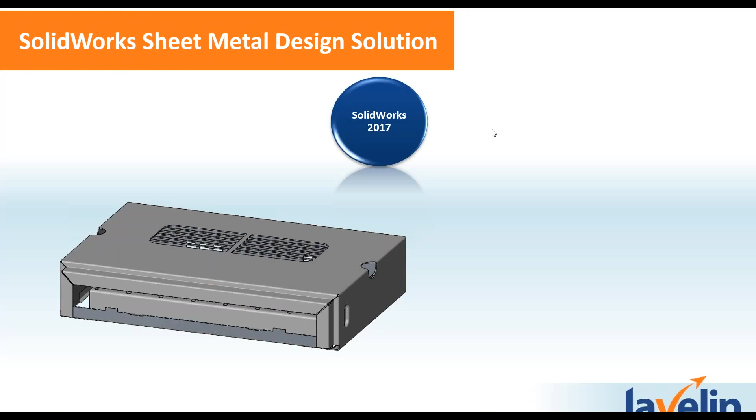So now we're going to talk about the solution. Let's get to our solution demonstration. We're going to be talking about SolidWorks 2017. And what SolidWorks does is let us do several things, such as leverage our legacy data, so we can use previous files that we have to create new parts. It lets us design fit and function in context around the parts that we have. And it also lets us modify our existing processes to switch parts between machined and sheet metal manufacturing. This is the advantage of working in 3D, the advantage of working with SolidWorks.

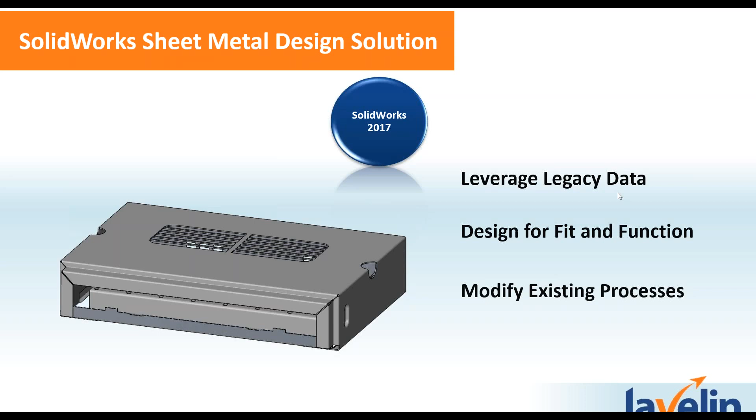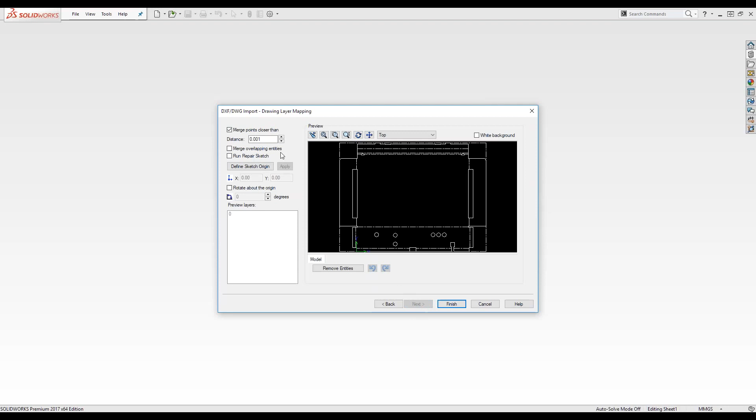So let's get straight to it. Let's talk about using SolidWorks to leverage legacy data. For this, we're going to open up SolidWorks, and I have a DXF that I created. It's the flat pattern of a part that we have. What we're going to do is import it as a new 2D sketch. You can see it gives me several options here. I'm going to merge any overlapping entities just in case there's a mistake, and I'm also going to run the repair sketch just to be sure that we're avoiding any errors as I do this.

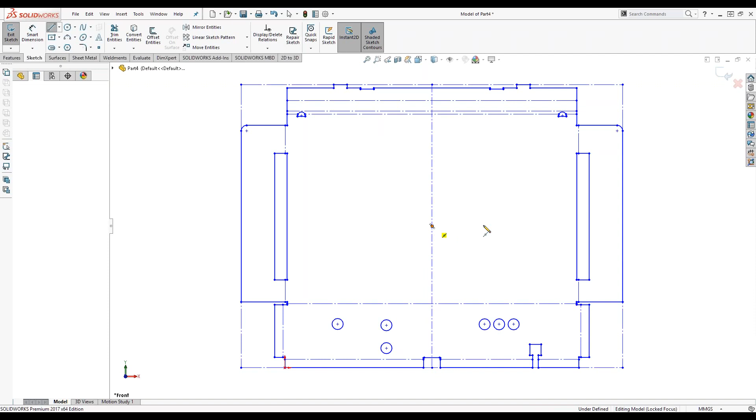You can see here the repair sketch utility let me know that no problems have been found. So that's great news. We can get started with our part. And here it is, you can see that's been imported as a sketch. And I can actually add things to this as necessary. I'm going to add a couple of construction lines here, just so that I can find the middle of my part. This will be helpful later on, but it's good just to know where that middle is going to be.

And so what we can also do here now is we're going to escape out of our sketch, and we can see that this part is not actually on the top plane, it's on the front plane. So it's very easy for me to go in here, just say edit sketch plane, and select the top plane as the new place for it to be. And you can see it orients accordingly.

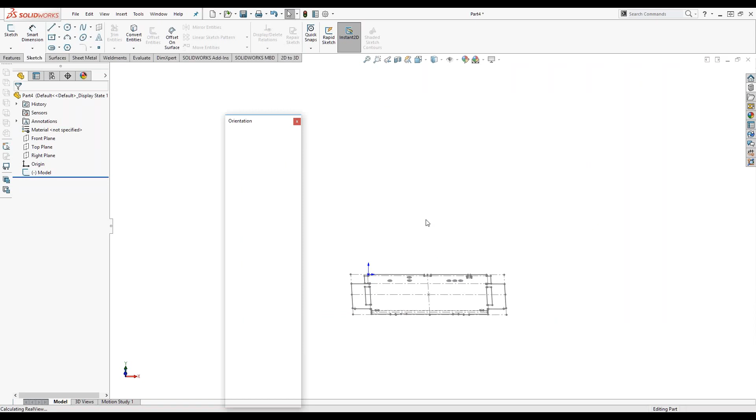So what I'm going to do is flip to my top plane, and we're going to start making some new sketches. So the first one I'd like to do is I'd like to select this entire outline, and I'm now going to convert it into my new sketch. And you can see it shades in. SolidWorks letting me know I've got a closed contour, so I can start making a part out of this. Not going to do that quite yet, though. I'm going to make a couple more sketches here.

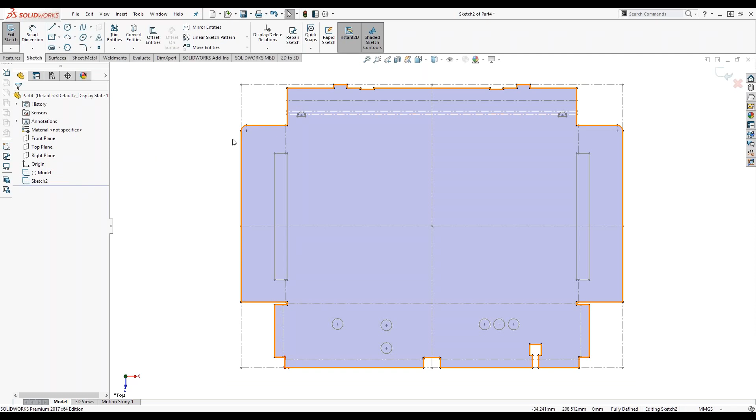So I'm going to make one which will be all of my cutouts. So you can see that there are quite a few things here, which I'm going to need to make into cuts. So I can just use the select chain tool on all of those. And then I can grab these circles here, because these are all going to become punched out parts of my sheet. Sorry about that. I escaped before I was done. I have to remember to hit the Convert Entities button.

So if you haven't used this before, the Convert Entities can also be used to take lines and edges and things like that from other sketches and other features. And so it's very useful when we're working in SolidWorks. There we go. We're also going to make another one here. Just convert my bend lines in. And so we just need to select all of those. And so this is just what we're doing right now. We're grasping the information that we've put in to our part, and we're telling SolidWorks what's important, what we need to keep.

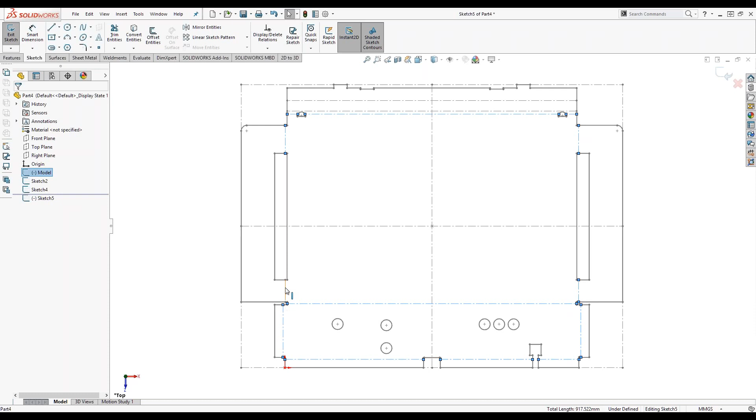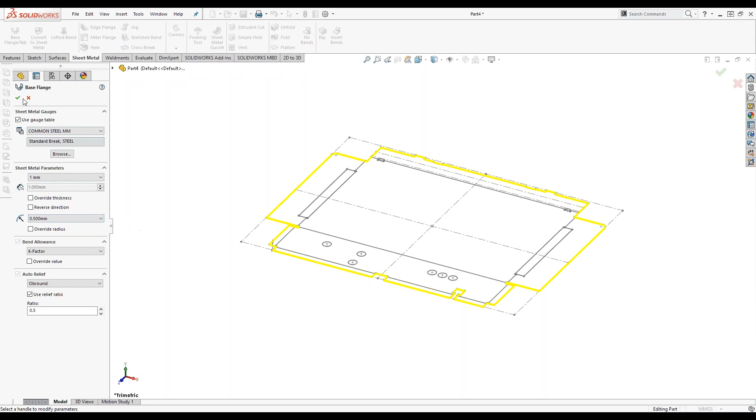Good. So at that point, what we can do is we can actually start making this. So if we go over to our sheet metal tab here, we can say create a base flange. And you can see it's picked up that it's a closed contour. I'm now going to choose a gauge table. And what this gauge table allows me to do is it allows me to tell my designers, these are the different types of material that we have. Feel free to design with them. And I've already got information like my material and some of the different bend radii included in it. Then at this point, all I have to do is hit OK. And now we've got a flat sheet.

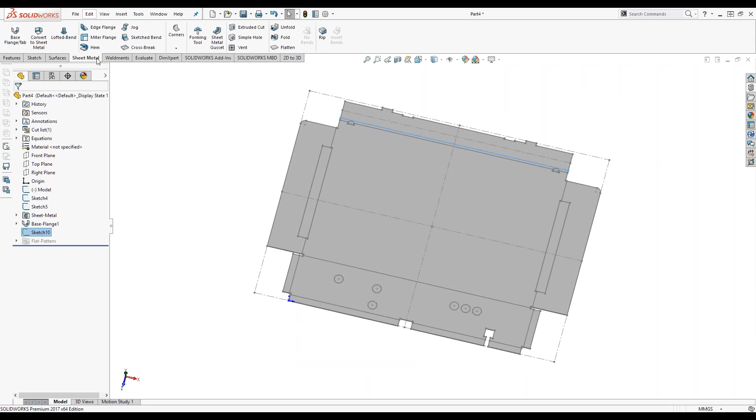At this point, just before I do anything else, I'm actually going to create a jog. And so in order to do that, I'm going to need to make another sketch. And we're going to use that Convert Entities one last time. So I'll create that. And then from there, I'll go to Sheet Metal. And I hit Jog. All I have to do is select the fixed face. And you can see it's giving me a detailed preview of it now.

I'd like to flip the side. And I'm also going to say I'd like to fix the projected length because we know this is the flat pattern that we're working with. So it doesn't make sense for it to project it as the same length. And there we go. There is our jog. We started bending our part.

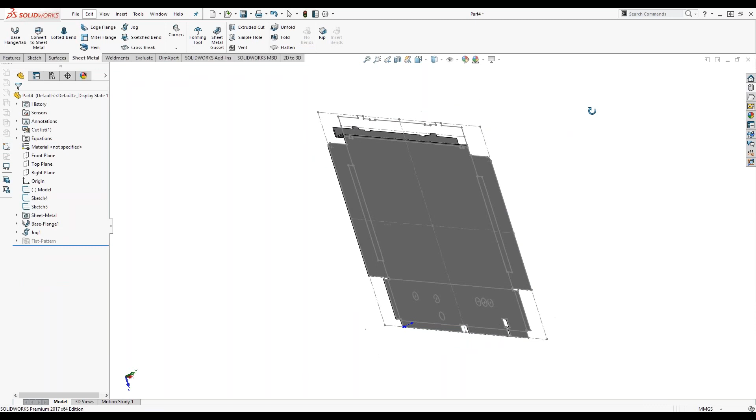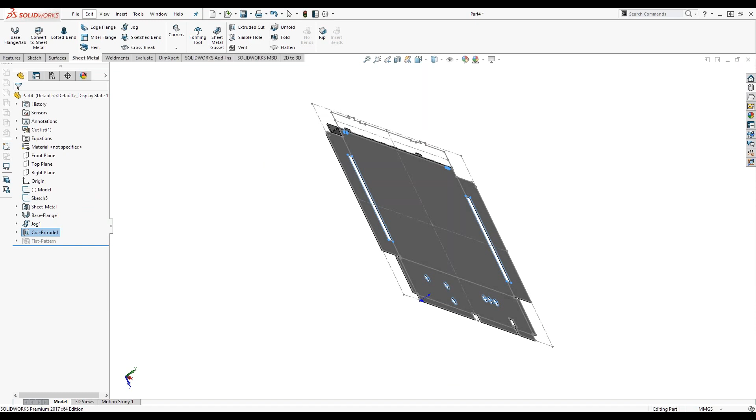Now we can take all of these cuts here and we can turn those into extruded cuts. Really cool feature that I've got turned on there is the link to thickness. So you can see without it here, it's doing a 10 mm cut. Or I hit link to thickness, and it now doesn't matter if I change this to be thicker sheet metal, it's automatically going to link it to that thickness. So that's very helpful, and that saves me time later on.

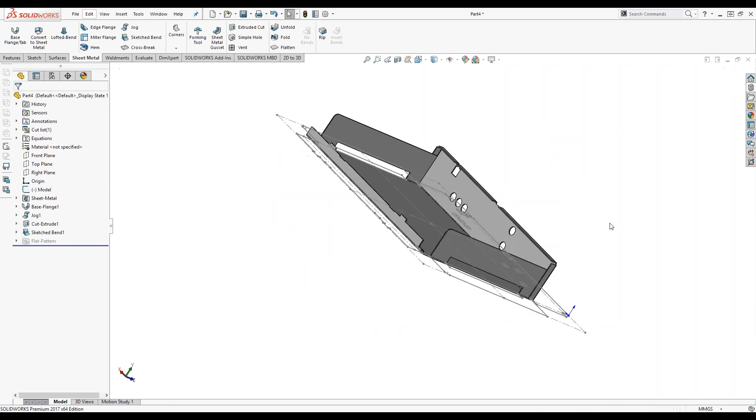At this point, we can say it's time for some sketch bends. And before I do that, I'm actually going to just make sure I select the correct sketch. There we go. And at this point, we just select the fixed face again, and you can see it's giving me that preview, and there we go. That is our part. So you can see in just a couple of minutes there, I was able to rapidly create this part.

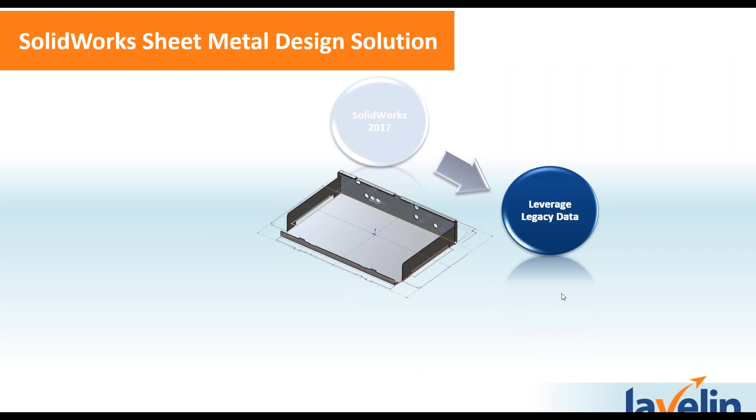So yeah, it was very easy for me to go straight from that 2D sketch, that DXF, right into a 3D part. SolidWorks helped me the entire way. It was checking the sketch for errors, and this ensures accuracy, it avoids those errors. And at this point, I can now start applying new features to my 3D part, or I can use it for other things.

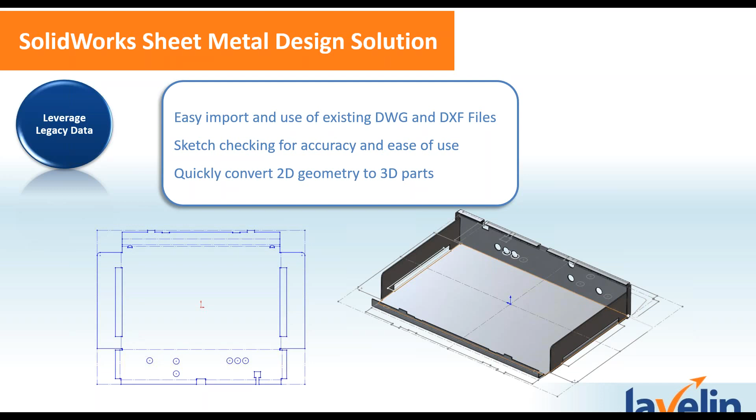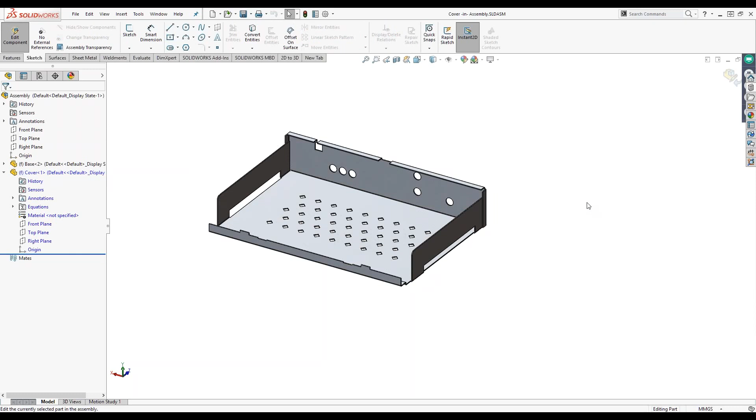So what this lets me do is it lets me now design in context. So I can say edit this part, and I can flip around to this face and start a sketch on it. So I'm now sketching on a face that is not actually in my part, which I always find very cool when I work with this. So we can quickly create a line there. I'm just going to flip this one to be for construction. We can start making more lines. And you can see here I'm picking up those relations between the part.

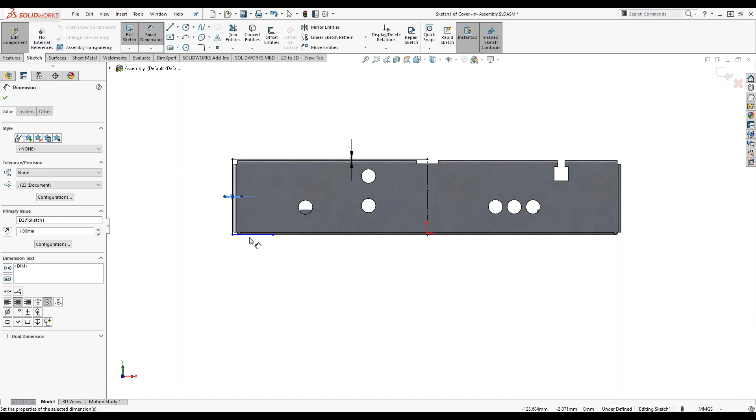And there we go. At this point, we can now start dimensioning. And we can actually dimension this directly to that part that we're designing around. So this is a really fantastic way to do top-down design. And it means that we can be assured that our parts are going to fit properly. So just like we can dimension to it, we can also add relations. So let's select this edge here, this one. That's now easy for me to make a collinear relation there.

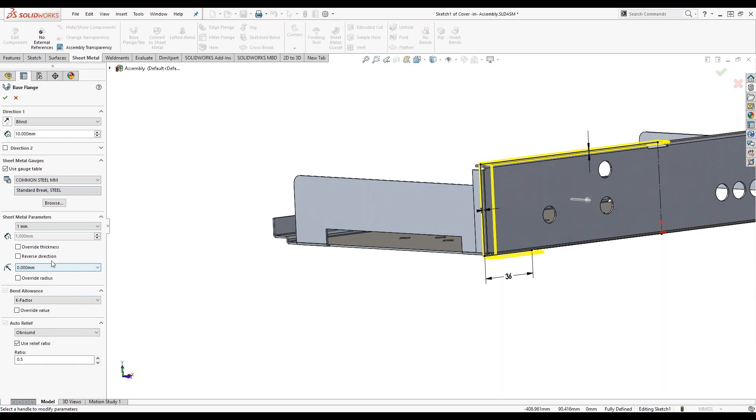So we saw before when I had a closed contour, as I went into the sheet metal base flange tab function, it created just a sheet. Well, now we can see that it's extruding it as a thin wall feature, which is fantastic. It's already picked it up. I can come back in, use my gauge table once again to make sure that my designers aren't doing things with stuff I don't have in the shop. How often have we had that happen? So I can do that.

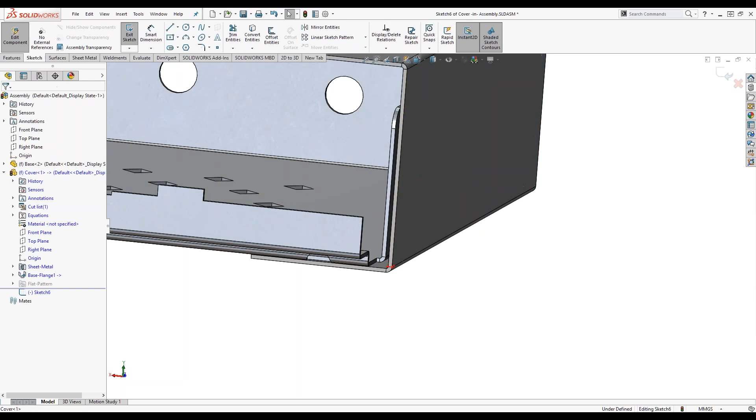And I'm actually going to design this completely around this existing part and just say go up to that vertex there. There we go. That's the beginnings of our cover here. We can now start adding some flanges to it. So I'm going to add a miter flange. And in this case, we're also going to use a bit of both parts here now. So we're going to get it right at that intersection there and come out here. And there we go. That's pretty much it.

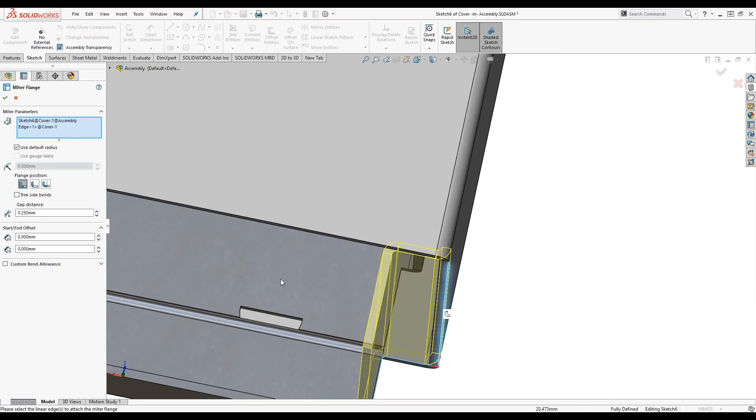You can see the flange is shown automatically. So you can see I can actually choose where the flange is. And if I was looking at it this way, I would see, no, I'm going to have some serious problems with interference there. So this lets me just make sure that the part is going to work properly. I can do things like add an offset here. And that's going to just make it fit better around the part. And then I can also just propagate it down this edge here.

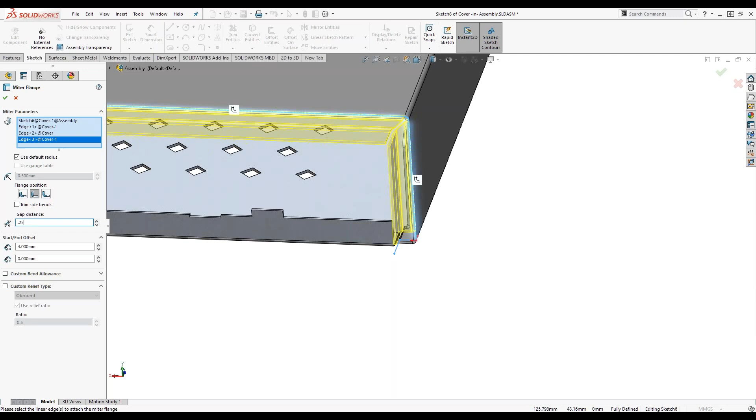If I'd like to, I could increase the size of my miter corner there if I want. I can increase the gap. So this is great. I can create this flange very quickly. If I wanted to, I could have included another flange in there, but then I wouldn't have the opportunity to show you this great edge flange tool. So this one's really great.

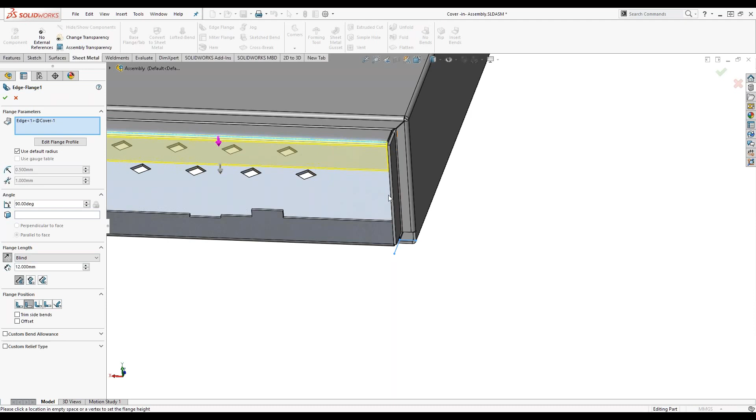You just select an edge and drag it down. It's as easy as that. 12 millimeters looks about right. I can do the same things as before, picking where I'd like the flange position to be. And then I can also grab onto this one here. And again, we can see we're not going to have any problems with interference.

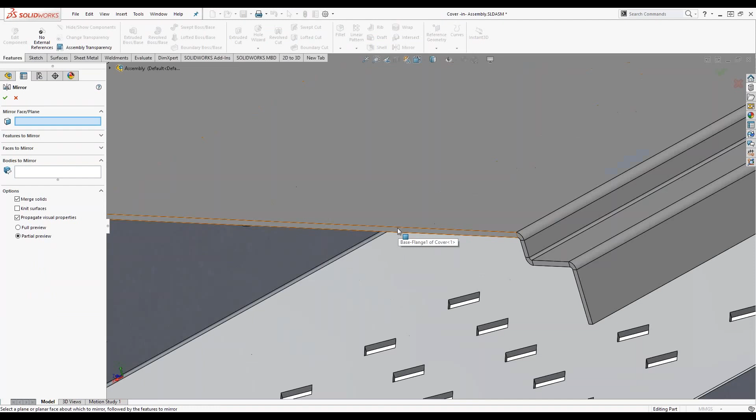So we can very quickly create those flanges. At this point, I've already done half my cover. I don't need to do any more work. I don't need to go through and do any more sketching. All I can do is come back here and use a good old-fashioned command. So I can select this as the face there, and then I just select the entire body. And there you go. As quickly as that, we have created our cover.

So now I'm going to open this up and I'm just going to show us some of the new things we can do. So we can take it out of that in-context design and open it as we might normally. So I've just got the GoToWebinar toolbar in a very inconvenient place. I'm going to move that.

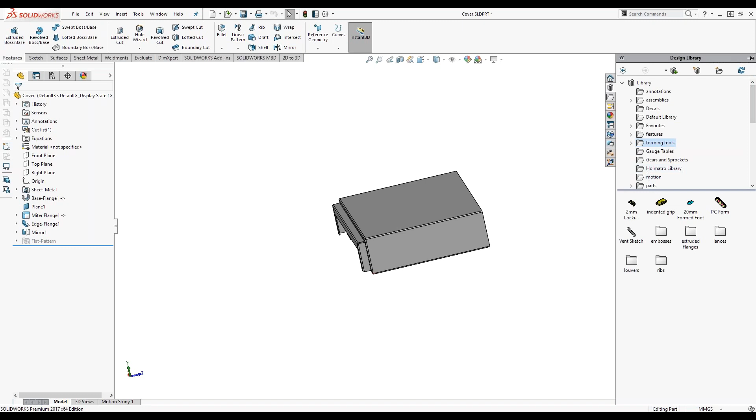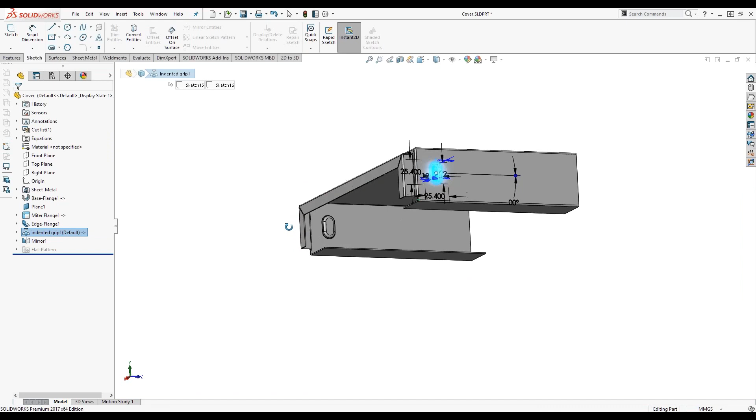So I'm going to go into my design library here. And you can see I can now start adding forming tool features. So these are just like a library feature. I can drag it on. I can position it much like I would with the Hole Wizard. And I can add it in just like that. Very easy to do. If I wanted to, I could move this above my mirror here. And you can see that because SolidWorks is a feature history-based modeler, it adds it to both sides, just one convenient feature. I'm actually going to roll back before that mirror.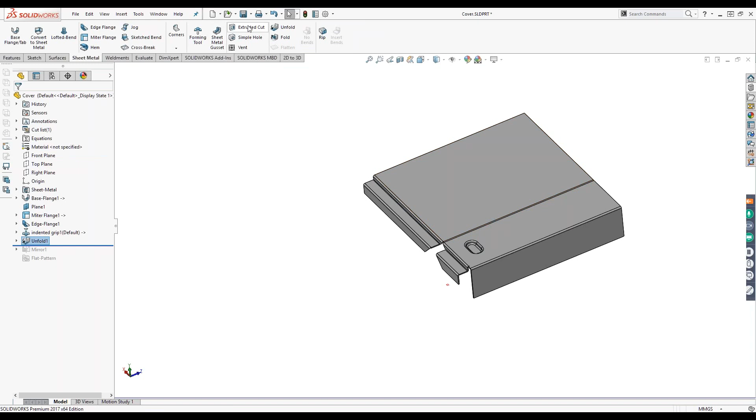And now, what if we wanted to add a cut here, and we want it to be completely normal to our material? Well, that's also easy to do, because we can just unfold this bend, and now we can add our cut directly to it in a very convenient way. So I'll just make a quick circle here, put it on my midpoint. Doesn't really matter how big it is. And there we go. As soon as we exit, we can see it's linking to thickness once again. And there we have it. We now have our cut.

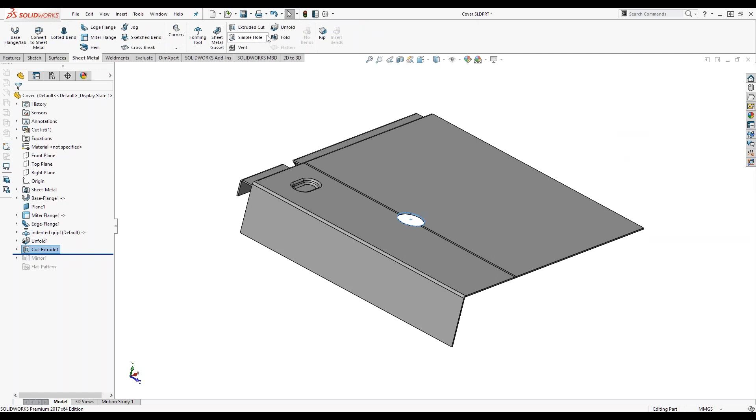We can go back to our sheet metal tab and just quickly fold this back up by saying collect all bends. And there we go. That's our part. And once again, because of the feature history-based modeling, it's now been applied to both sides of our part. So this is very convenient. So you can imagine this is a really easy way to do this. So I'm just going to skip ahead a little bit. I'm actually going to close this part down.

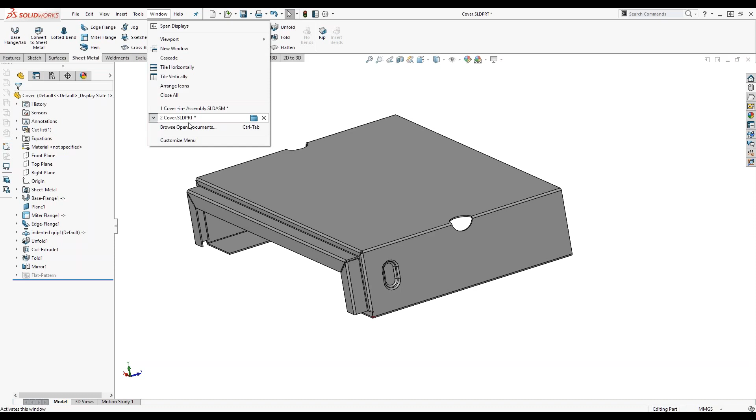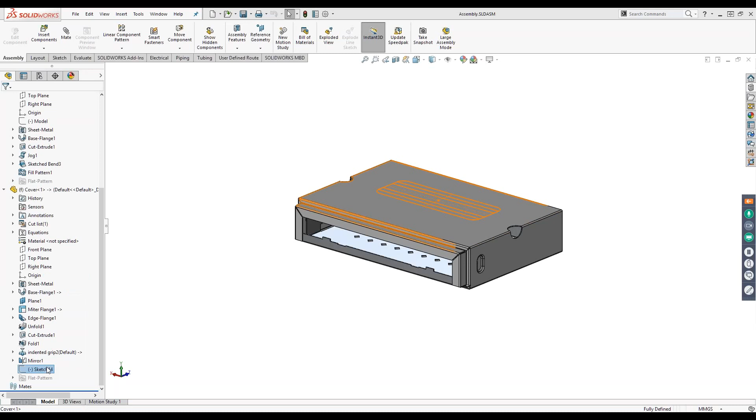And what I'm going to do now is I'm actually going to grab a different file that I've created for this, because what I would like to do is show you the vent feature. And the reason this vent feature is important is because it's going to really highlight one of my points later on. So as I open this part back up, you're going to see that I now actually have another sketch here. And so this sketch is what I'm going to use to make a vent. And this is, as you can imagine, going to be an electronics box. Sorry, I don't know if I mentioned that. It's an electronics box. And so it's going to be really helpful to have that good ventilation.

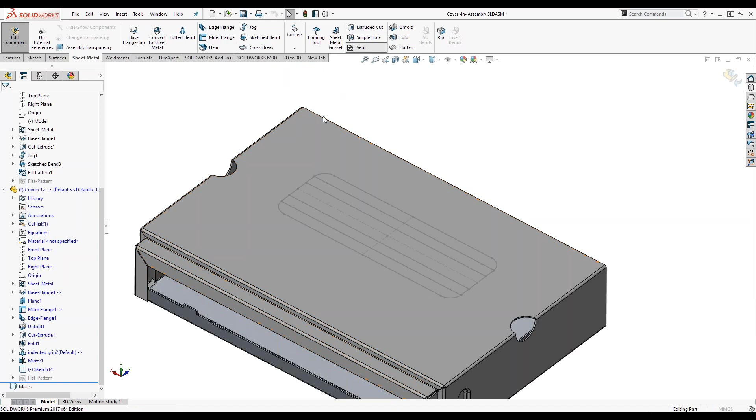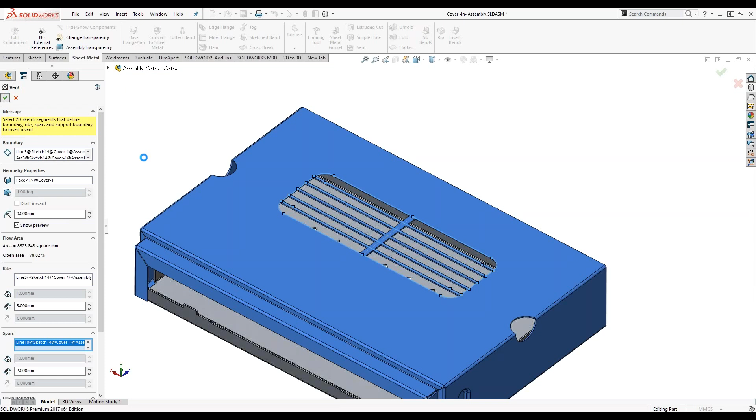So we're going to edit this part just like we did before. We can come over to sheet metal, and we're going to grab the vent. At this point, we can use these sketch entities to define the outer boundary of my vent. As soon as I define the whole thing, it shows me where it's going to make the cut. Now it's just easy to grab the other entities and start defining my ribs and my spars. I could change the size of these if I needed to, so I have quite a bit of control when I'm using this vent tool. And there we go. There is our vent. Very easy to do.

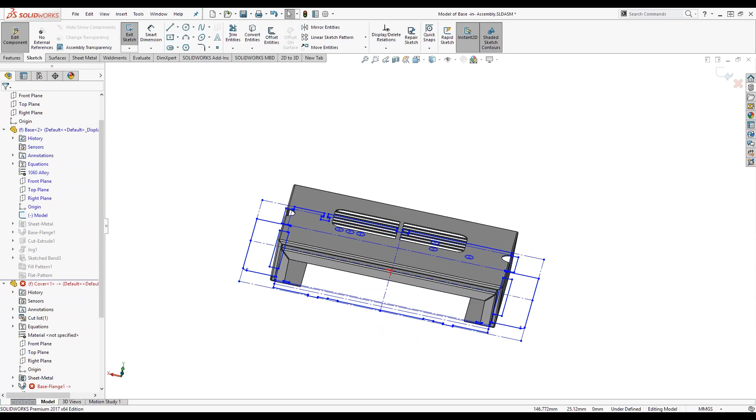So part of the reason I wanted to create this is because I want to show you an incredibly great thing about when we design in context. Beyond the fact that we're making sure that the fit and the function is going to be great, it lets us do something else. So if I come over here, back to my original sketch, I'm going to grab onto it, and I'm actually going to select the entire thing. At this point, I'm going to say scale entities. I want a 1.5 scale right about that midpoint.

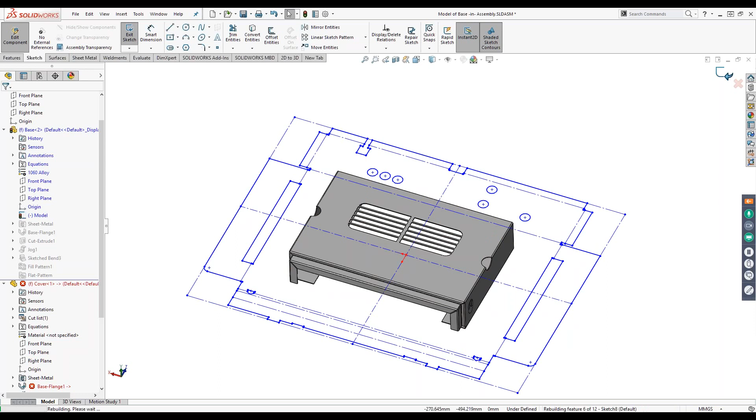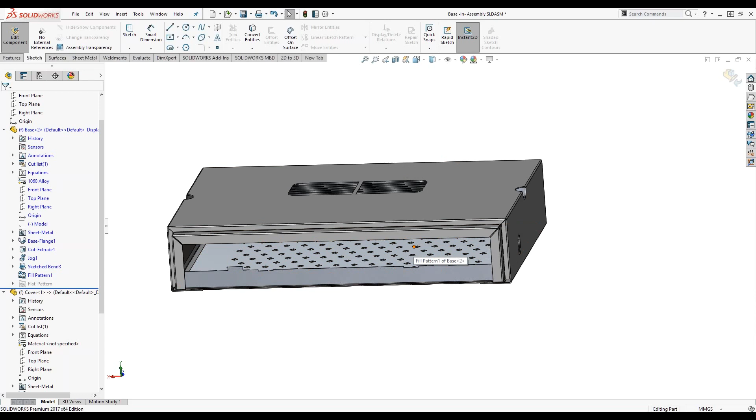So normally, this could cause me a lot of problems if the parts were not linked well together. And you can see it's actually showing some errors at the moment. But as soon as I exit this, SolidWorks is going to take a quick moment to look at what I've done, and you can see it updates accordingly. So I hope this will be pretty helpful for some of you. This automatically means if I want to make configurations that are different sizes, anything like that, that's really easy to do. This saves me a ton of time. It's incredibly helpful, and it's one of the main advantages, I think, of working with SolidWorks for sheet metal design.

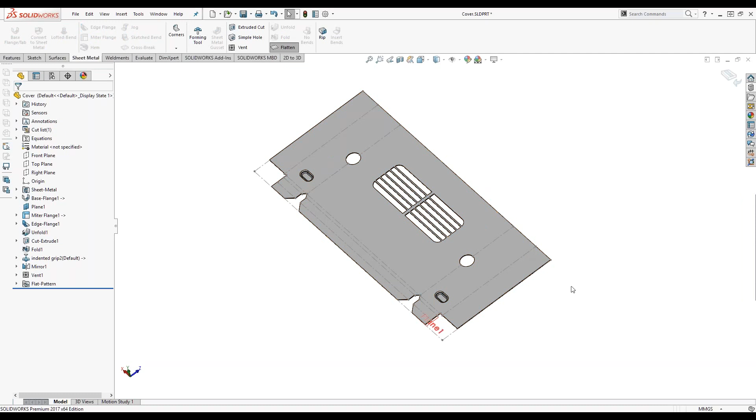So I'm actually just going to undo all those steps because that's bigger than I would like it to be. And there we go. If we open this part back up, when we're sheet metal, we always get the option to go back to that 2D view, to that flattened shape. And so from here, all I have to do is right-click on it, and I can export it to a DXF or a DWG. So I can export this to common file formats that I would normally use. So this is incredibly helpful.

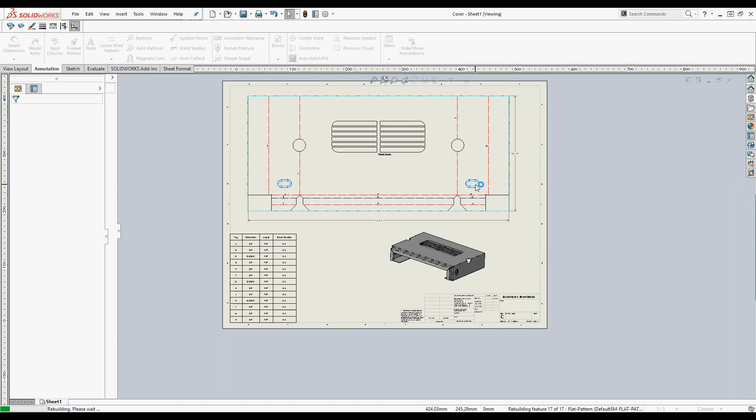If I close this back up, I actually have a drawing previously created of this. So I'll open up this drawing just to save time, but this is really easy to create. You can see here if I open up my view palette, SolidWorks automatically gives me the option to bring in the flat pattern. And it color codes all of my bends. I've inserted a bend table here, which has the direction, the angle. It's got the radius on it. So all of this information is really easily given over to people. I can add dimensions of my bounding box if I'd like. And so SolidWorks makes it very easy for us to create these high quality drawings.

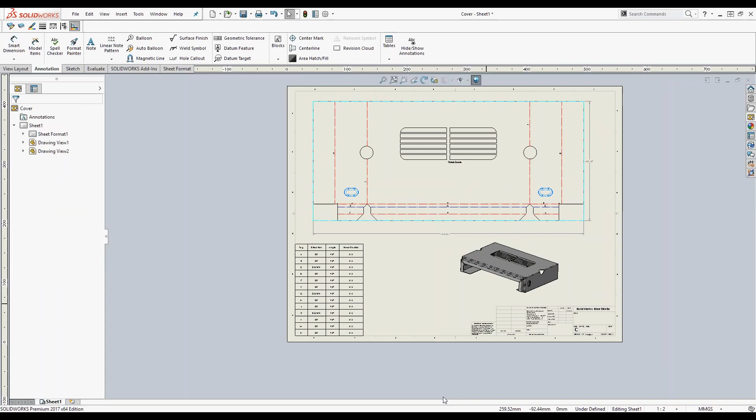So as far as designing for fit and function, it's fantastic that we can use our existing parts to define new ones. And if we change that part, the new one updates with it. And so this helps us ensure fit and function. It's great for if we want to make a new size of our part. It really saves us a ton of time in the long run. We can see it was really easy to add complex sheet metal features. We can add those normal cuts. We can add library features. And because of the part definition, our designs are robust. They'll update accordingly. We don't have to go through and check all the errors and see all the different things that are breaking. SolidWorks is doing all of the thinking.

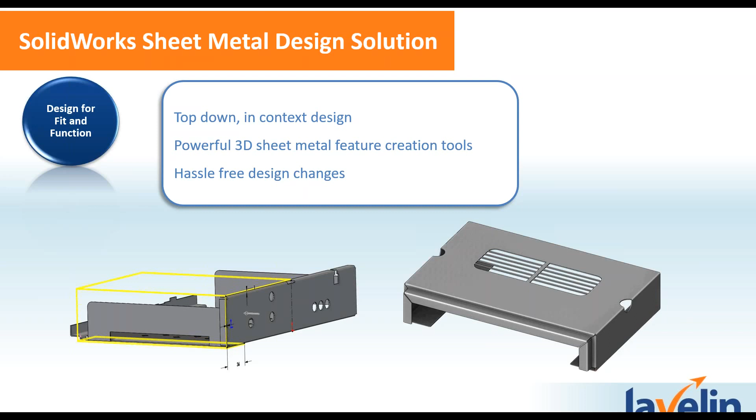We're also able to see that we can easily create those drawings, and this is done very quickly. Just because we're working in 3D doesn't mean we don't have the ability to work in 2D. We can still very much do that. We can also export to the formats that we need.